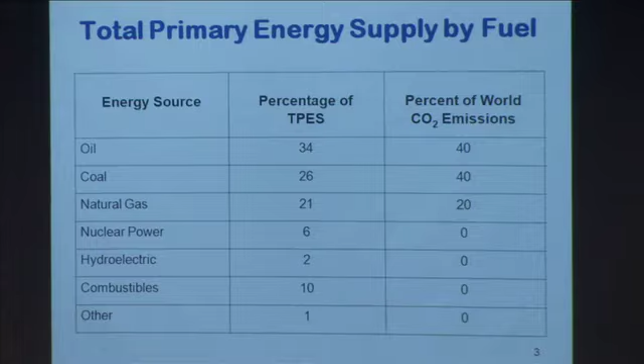So if you look now at the energy supply of the world—does this thing have a laser in it too? Yeah, it should. I'm worried that if I push, that's just what I worried about. Okay, there's the right button.

You can see that this is total primary energy supply—the energy content of the fuel. We do things in a very funny way: for these things it's primary energy, and for all of these things it's output. So before you get to use it, there's a big efficiency loss. From these, we're talking straight about output, but you can see the biggest is oil, coal next, natural gas, nuclear power, and so forth.

You swear this is a better one, huh? Well, I think I'll stick with this. I'll take the risk, I'm going to live dangerously. No, if I may drop it.

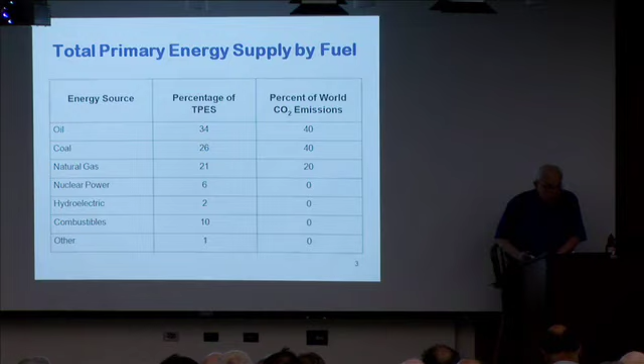When we talk about combustibles, we're talking about the fuel used by the poorest people. The poorest people gather up wood, plants, cattle dung, and burn it. Those combustibles don't have any net emission because everything that went into the carbon in them came out of the atmosphere. It's only when you start adding fertilizer, tractors, transportation and all that stuff that we get emissions. Down here at the very bottom, this includes all the renewables—all of them—and they're negligible now.

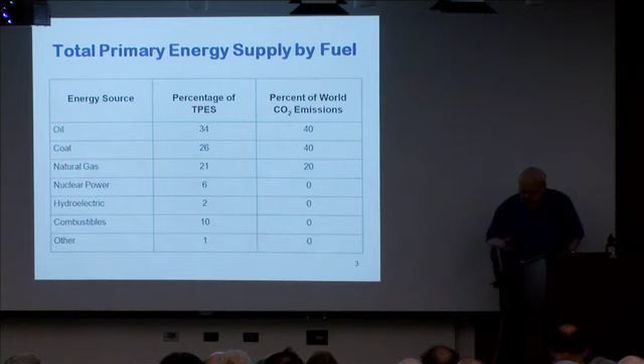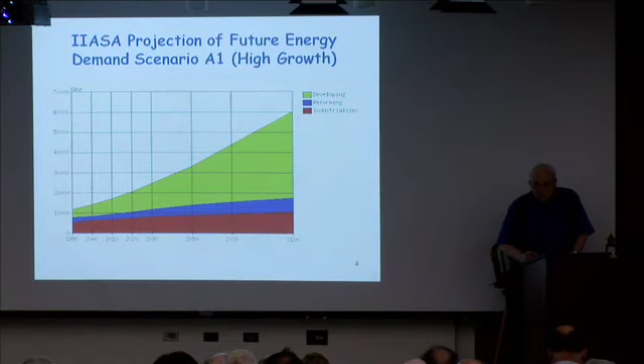I said earlier we've got a problem bringing developing nations into this. This is a projection of what's going to happen in the next 100 years under the business-as-usual scenario. If you like the IPCC stuff, it's very close to A1FI, A1 fossil intensive—that's business as usual. Most of the growth in this century is in the developing countries, not in the present industrialized countries. If the industrialized countries stopped emitting greenhouse gases entirely, we'd still be in big trouble. So we have to develop technologies applicable to the developing world as well as to our own.

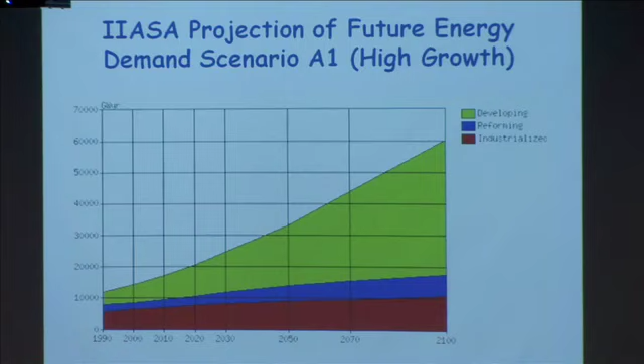That's an important consideration: is business as usual going to happen? Almost certainly not, because the price of oil is going to go through the roof, and coal is going to end up in short supply if this sort of growth continues through the 100 years. But we need solutions that can be applied elsewhere.

These are the IPCC predictions. I put them in so those of you who want to look at this on iTunes or wherever Stanford posts them can see what they are. You get the temperature ranges, and there are lots of issues here.

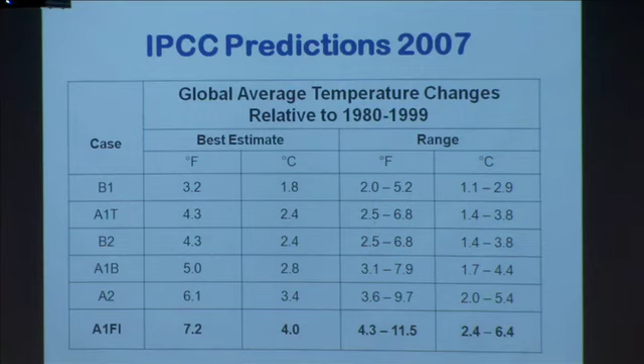There's lots of uncertainty in it, and the uncertainty needs resolution. The uncertainties are of a kind that in physics I would call systematic, not random. There are more than 20 models used to predict the future, and all of those models are tuned to agree with the past. They all have knobs in them—I can make this one more important, that one more important. They're all tuned to agree with the past, and they all disagree on the future. The spread you see here is a spread in models. As time goes on, we're going to learn more, and those models are going to come closer and closer together.

So if you want to look at decarbonization, what do we have to do? In the United States, the biggest single sources of emissions are electricity generation and transportation—those are the two biggies. So if it's electricity, you've got to talk about fuel switching.

We talk about renewables like solar and wind and nuclear, as well as things like geothermal and hydroelectric. If you look at transportation, cars are incredibly inefficient when you look at what goes out of the gas tank into the wheels. The EPA estimate on the typical driving cycle is that 12% of the energy in the gasoline goes to drive the wheels. That's really pretty terrible. So that's going to change, along with buildings.

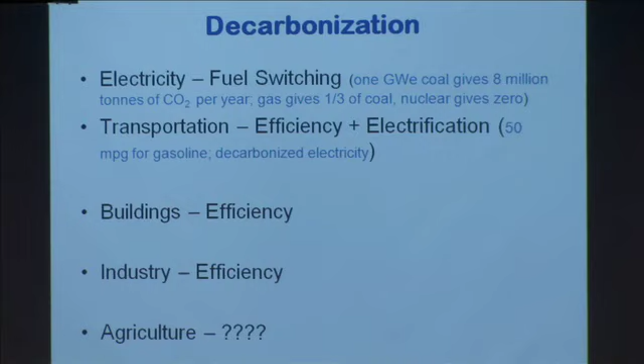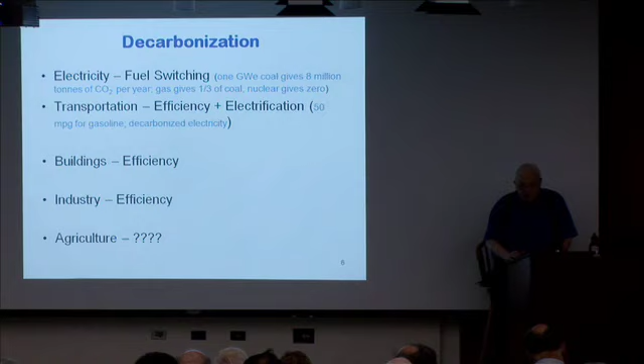We need efficiency—industry needs efficiency. Agriculture is a wild card here, and nobody knows what to do about it. Worldwide, agriculture and land use change accounts for 20 to 30% of greenhouse gas emissions. If you're talking about reducing greenhouse gas emissions by the amounts people are talking about now, by 2050, you have to get at agriculture, and nobody knows how to do it. In the United States it's much less, only about 10%. But there we are.

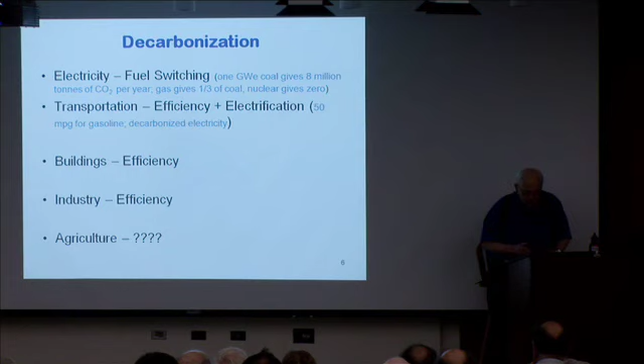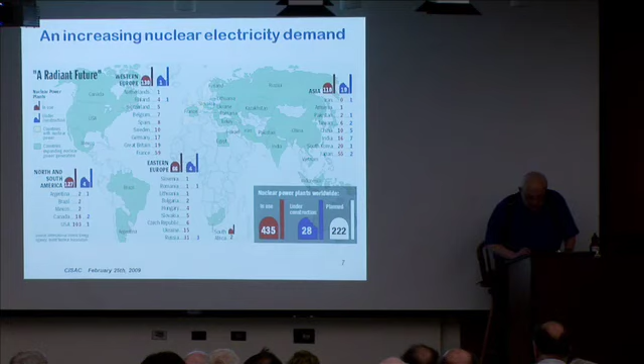This is an introduction to nuclear power. So why should we do nuclear power? There is a worldwide big increase in nuclear power, and if you look just at the United States, you would not understand this at all. There are now 435 power plants worldwide, 28 under construction, and another 200 planned.

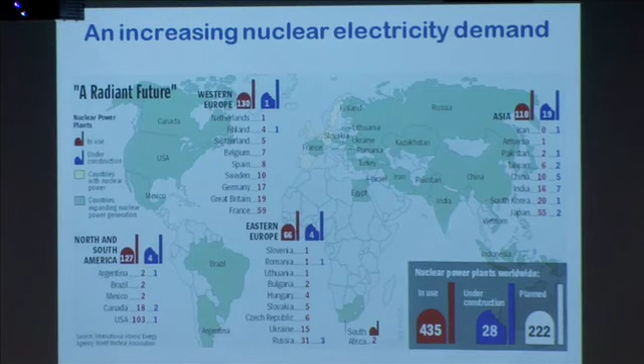Most of those planned are in Asia, but even Europe is moving back to nuclear. Italy, after Chernobyl, abandoned nuclear energy—they now are talking about building 5 nuclear power plants. Britain is going to start again. Sweden has decided not to shut down their plants. The only hardliner still saying let's phase out nuclear is Germany, but that's for political reasons, and we'll see what happens.

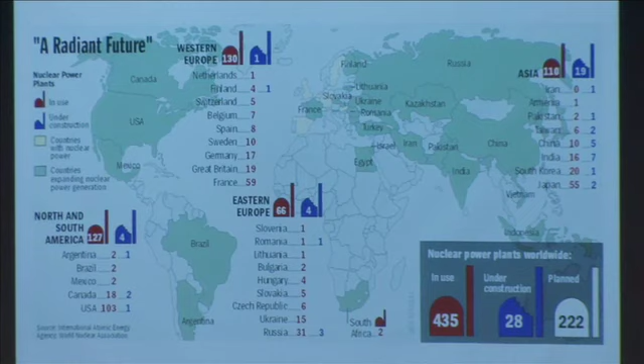The main attraction for nuclear in most of the world has nothing to do with greenhouse gas emissions. It has to do only with available energy. Energy's in short supply, energy's expensive. If you use coal, you do a lot of nasty emissions and hurt all sorts of things, and hurt your population too.

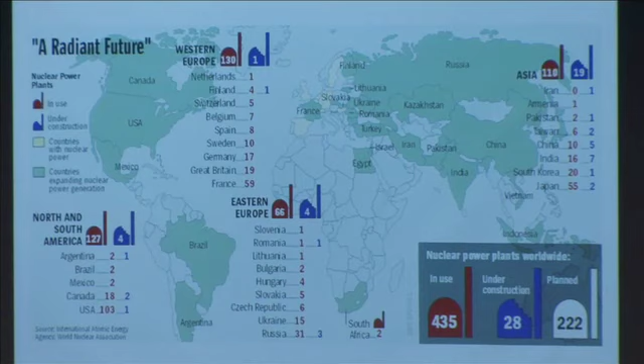So when you're thinking about this, you should be thinking about large-scale electricity with almost no emissions, and what that can do.

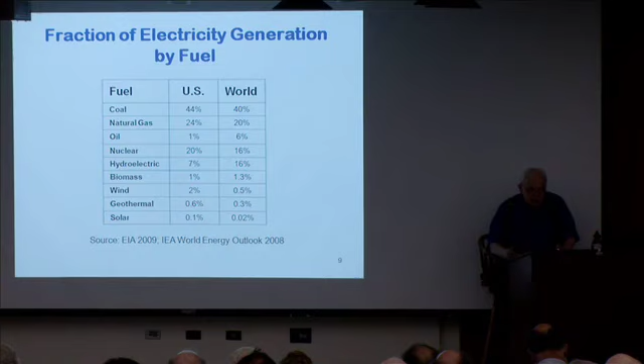This is the fraction of electricity generated by fuel. Nuclear is now 20% in the US, 16% in the rest of the world. One thing I've already mentioned that you should keep in mind is that natural gas is so much better than coal that we really should be switching. Big hydro is already heavily developed in most of the world except for Africa, and nuclear is growing like crazy.

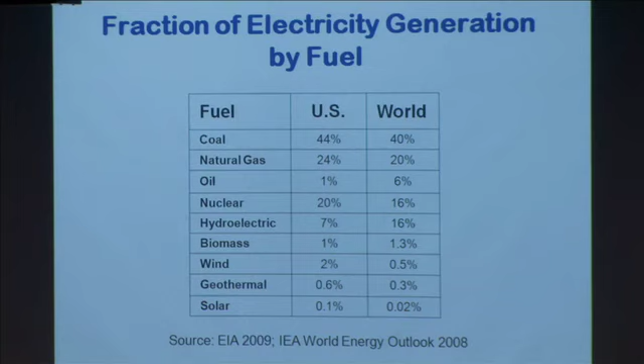Now, how should you think about using nuclear power? Nuclear power is very capital intensive and expensive. To build a big nuclear power plant, costs are something like $6,000 per kilowatt.

Incidentally, that's the same as the cost of solar photovoltaics these days. But you should look at this, and if you're going to build something that's so capital intensive, what you want to do is run it all the time. You want to produce as much electricity as you can because you want to pay the mortgage on all of that stuff.

So if you look at this, this is California, a particular year. You see the big variations in use through the year and through the day of the week. And there's something called the base load. This is a suppressed zero down here.

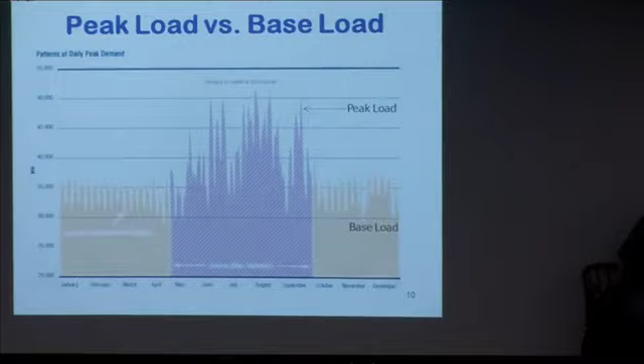And it's about half of the peak. People should think about nuclear energy as baseload power, not the kind that you turn on and off, because if you think of turning it on and off, you're going to find nuclear electricity getting to be unaffordable.

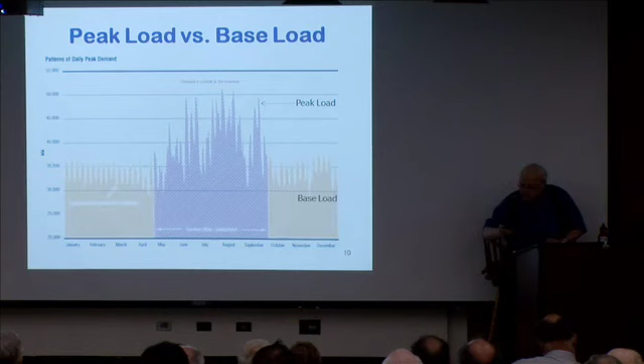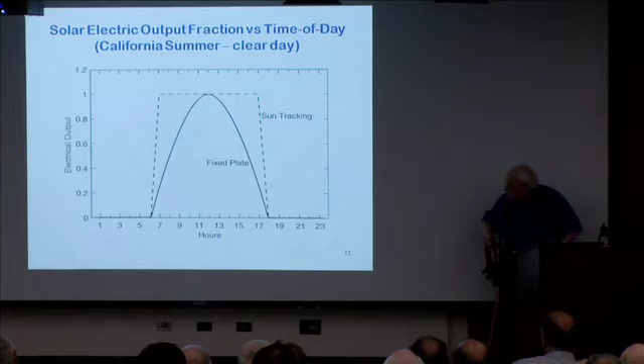If you look at solar and wind, you've got another problem. If I look at solar, this is the output of a solar photovoltaic system, considering the fraction of output from the maximum, which is high noon at the brightest summer day. You can find in DOE's Energy Information Administration a map of the United States showing the average output of a solar system in various regions. The highest region is, of course, the Southwest Desert, and it's 22% of capacity.

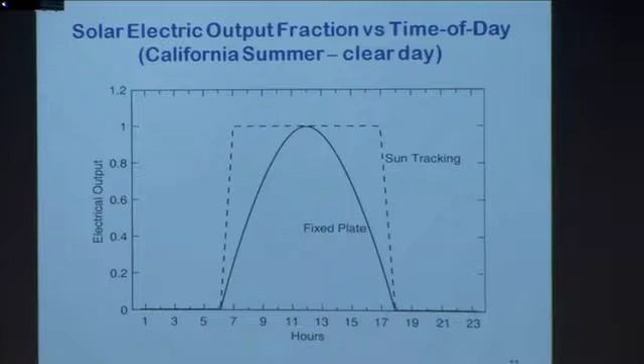So if I put in a kilowatt capacity system and average over the whole year, how much do I get? I don't get 8,000 hours times 1 kilowatt. I get 22% of that. That's the reason solar electricity is so expensive.

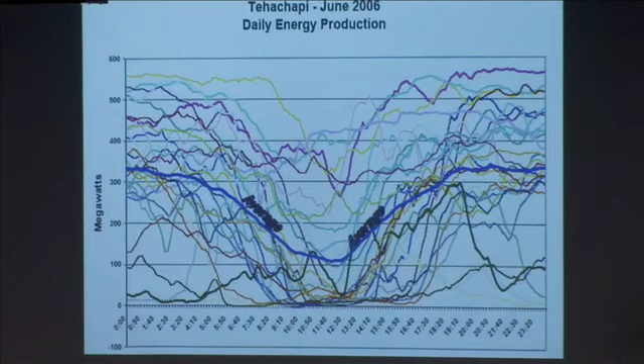Wind is a very messy thing. This is one month of a big wind system in California. If you look at it, you find days when there's practically no output, and days when the output stays up. You find nothing that's constant, just an average that looks like this. Wind has got a real problem, and there's really no good analysis of what to do about it.

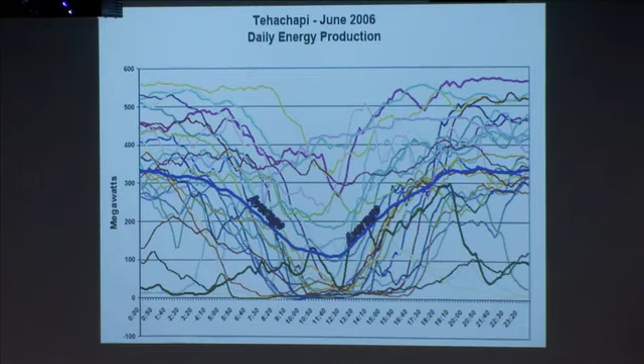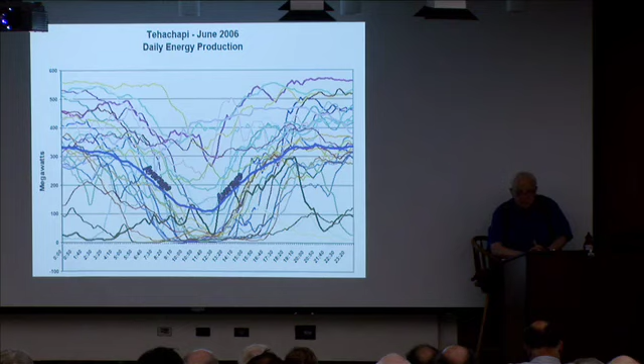The big issue for wind and photovoltaic is energy storage. So any of you who want to solve the world's problems with wind and solar have got to think about how you're going to do energy storage—not the kind you put in batteries. You need things measured in gigawatt weeks, not megawatt hours. What's being talked about today is megawatt hours of storage, not gigawatt weeks.

So if I had to advise any of you how to make the biggest impact on greenhouse gas emissions by using renewables, I would say go to it and do storage.

So let's switch to all nuclear, and here's what the problems are. The critics say that nuclear costs too much. They say it's not safe—radiation and accidents. They say waste disposal is a problem, and they say the chance of weapons proliferation is too big. Let's look at all of these things.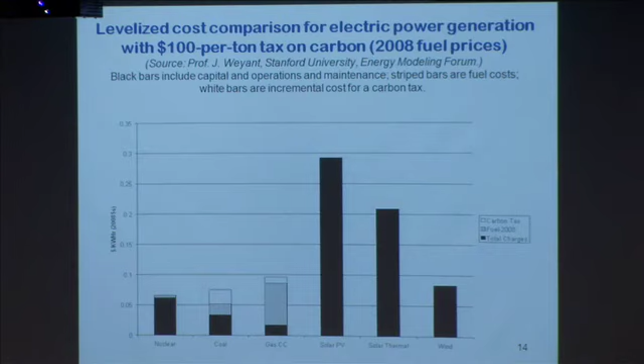If you look at natural gas, the biggest thing is the fuel cost, but natural gas prices have come way down since this was done. Now if you look at solar photovoltaic, solar thermal electric, and wind, the problem is that the sun doesn't shine all the time, and you have to amortize your investment over the time the sun shines. So as far as cost goes, nuclear is fine.

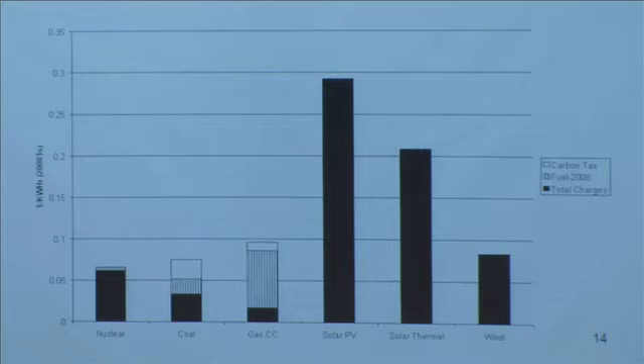There are 3 new analyses—there are references in here at the end if you want to look at them. One done by the National Academy of Sciences in their new study, one by the MIT Energy Group, one by the DOE. They all say 6 to 8 cents a kilowatt hour for nuclear electricity.

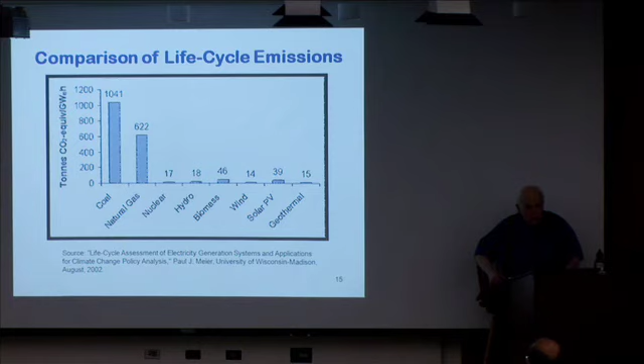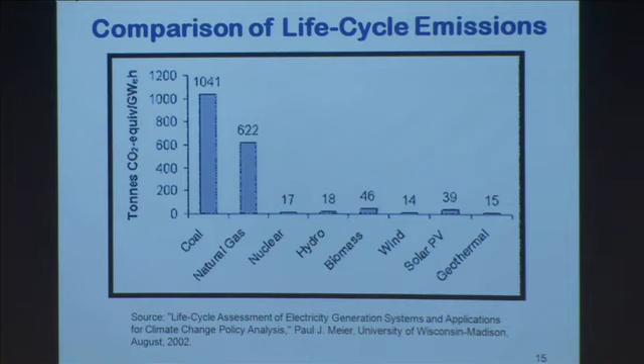People wonder about life cycle emissions. So here are life cycle emissions. Now, what do life cycle emissions mean? It means I have to make the steel for the plant, and that emits greenhouse gases. I have to transport it. I have to mine whatever fuel I'm going to use. I have to refine it. I have to bring it in. So here's life cycle emissions per kilowatt hour, and you can see that as far as nuclear goes, nuclear and the renewables are all about the same. So that is not really a problem.

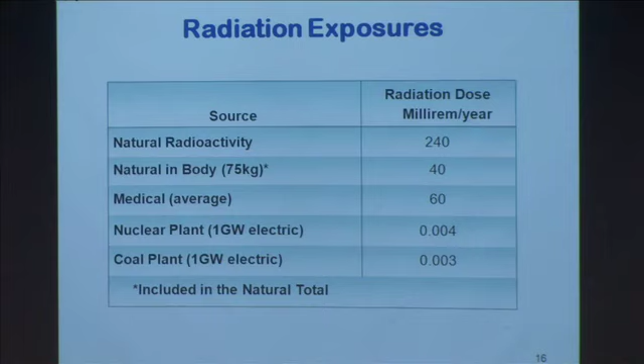One of the things that worries everybody is radiation. Natural radioactivity: when the Earth was formed 4.5 billion years ago, it got uranium in it, thorium, potassium, long-lived potassium. So there's a natural radioactivity that we live in. Cosmic rays bombard us from space all the time.

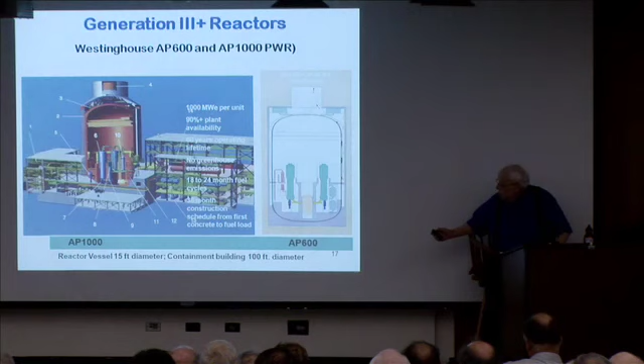If you look at the typical thing that the average US citizen gets, it's 240 millirem per year. Never mind what a millirem is, just think of it as a relative measure. That's what humanity has evolved in. We live in that. One of the things that surprises everybody is that everybody is radioactive.

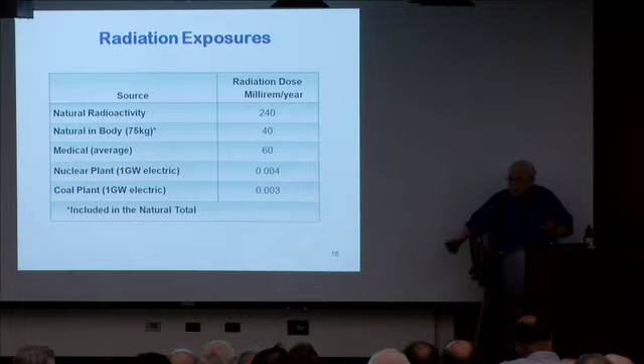You're radioactive because one of the things incorporated into all our bones is this potassium. Potassium has nothing to do with bomb tests. It was put into the planet when it condensed out of a solar nebula 4.5 billion years ago. It has a very long lifetime, and when we build our bones, potassium and calcium, being chemically related, get incorporated, and we get 40 millirem. A sixth of the natural dose comes from that. A skinny person gets less, a heavy person gets more. If you're sitting next to a skinny person, you are getting less radiation than if you're sitting next to a not-skinny person. So you might think about that one.

Medical imaging gives us more, and the nuclear power plants give you 0.004, 1/10,000th of what you get from your own body. A coal-fired power plant gives you about the same. Now everybody looks at that and says, well, that's if they're working right. What if they're not working right?

There are two big accidents that came along: one is Three Mile Island, and the other is Chernobyl, and their consequences are totally different. They're different because the reactors are built differently.

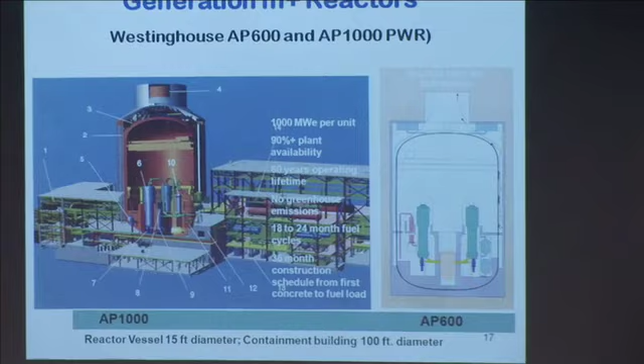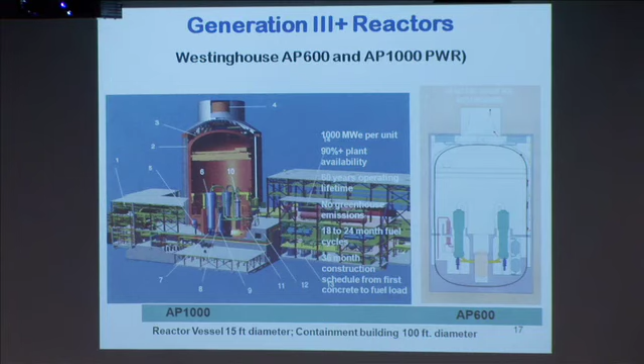This is a schematic of what a nuclear reactor looks like if it's built in Japan, the US, China, or Europe. It's got a big containment building around it. The reactor itself is a small thing in the middle, and the longer things are the steam generators. So here's the reactor, the steam generators, and this is the containment building.

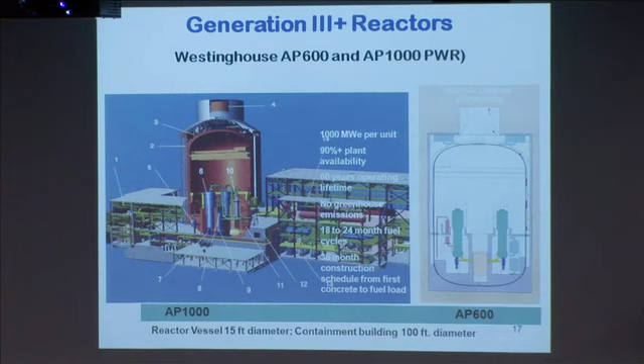If something goes wrong in the US, the containment building is supposed to hold it, and that is what happened at Three Mile Island. The core melted down. It released all sorts of radioactive nastiness inside. Radioactive gases escaped from the reactor, and radioactive water leaked out, but very little got out of the containment building. The biggest exposure to anybody at Three Mile Island was 100 millirem. Remember, 240 is the natural amount, and typical for people nearby was 10 millirem, relatively negligible on that scale.

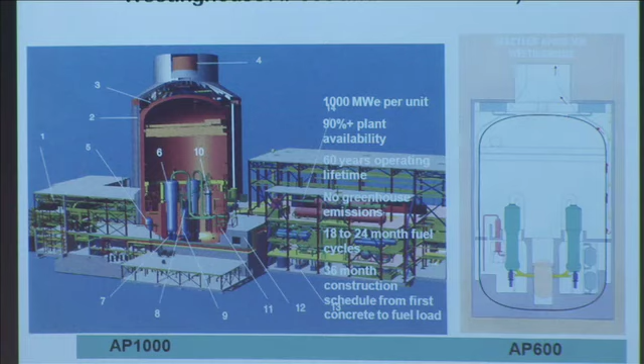The reason Three Mile Island makes such a big impact is a Jane Fonda movie called The China Syndrome. All you students are too young to know about it, but the thesis was that a reactor ran away and the core melted, and this hot stuff melted down through the bottom of the reactor vessel and through the building, going to melt its way down into the earth and come out in China—hence the China Syndrome. I don't know how Jane Fonda and the hero saved us all, but they did. That movie came out 12 days before Three Mile Island happened, and it had a lot to do with the reaction.

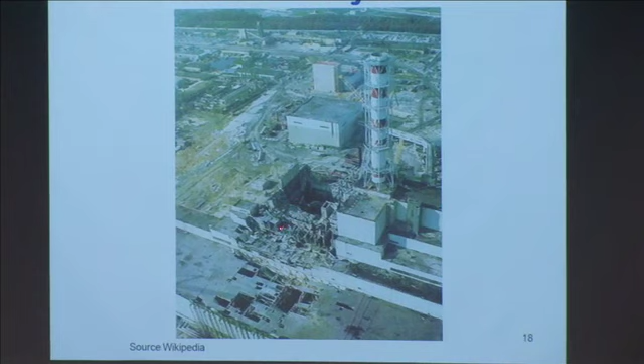Chernobyl is a very different situation. That's the Chernobyl reactor building. There are 4 reactors at Chernobyl; you can see some of the other ones here. This is the building from the one that went crazy. They have no containment on this kind of reactor, and the other problem is it can become unstable in certain operating conditions. For some reason, they took it into that region and it ran away.

This is not a nuclear explosion—this is a steam explosion. The reactor's output went up so fast that control rods couldn't move, and the superheated steam blew the roof off the reactor, blew the roof off the building, and spread the radiation far and wide.

Those reactors have never been allowed in the West or in Asia, strictly the old Soviet bloc. The European Union and the US have contributed a lot of money to modify reactors of that type in the old Soviet bloc and to shut down some of them.

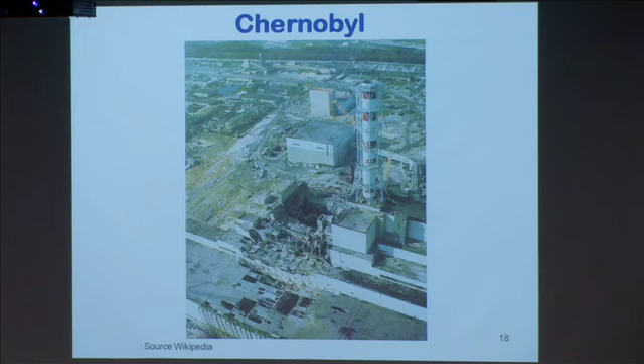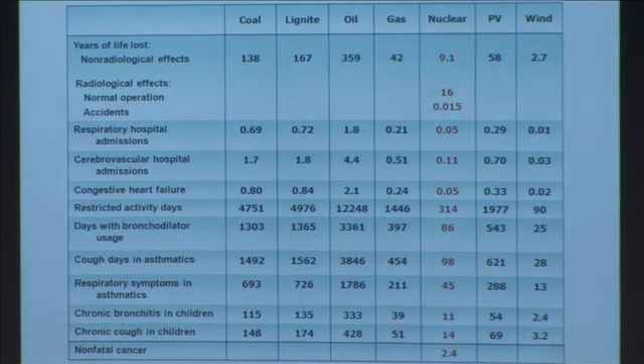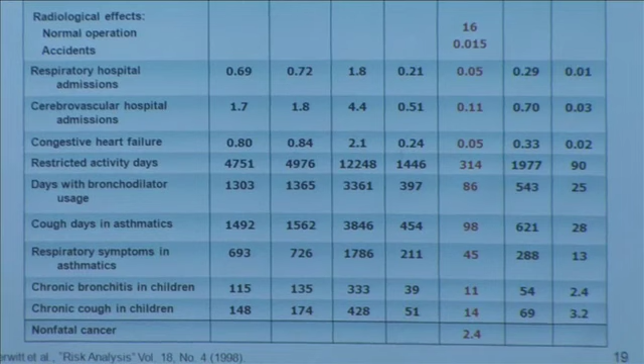Another thing people talk about is health effects. Now, health effects you can argue about. This is the only comprehensive study I can find. The reference is down there in the corner. It's a study done in Germany for conditions in Germany, looking at various kinds of energy sources, and the units are per terawatt hour, so this is per equal electric output.

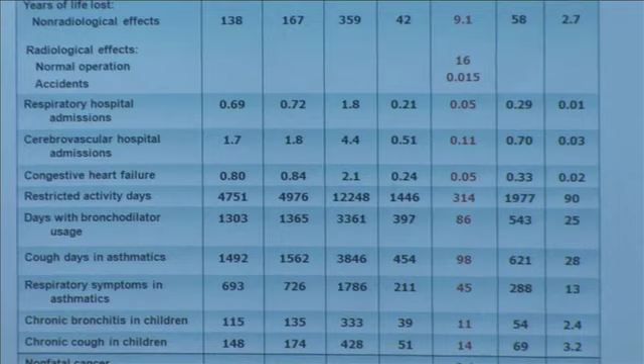It's supposed to include everything: mining the fuel, transporting the fuel, accidents on the roads with trucks involved in the pollution, all the rest of it. And if you go through all of this, what you will see is that the only thing better than nuclear is wind power in this analysis.

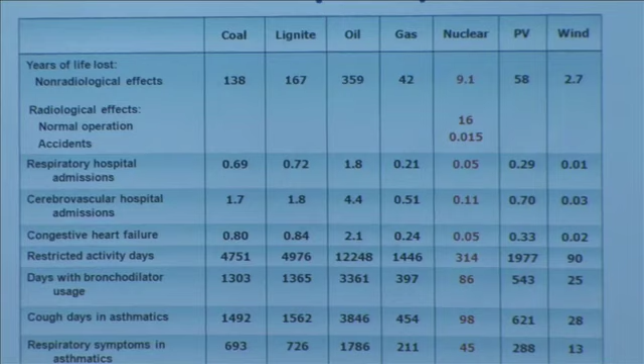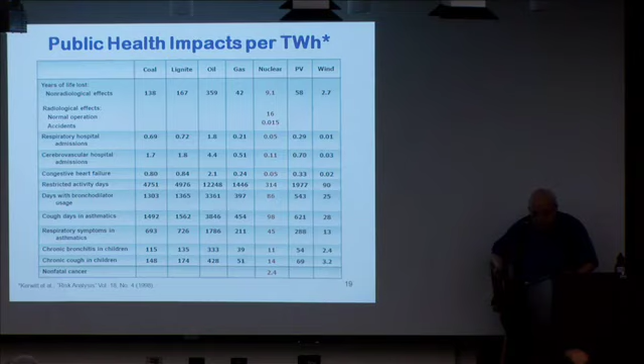This is including accidents. So per terawatt hour, accidents are very improbable. So if you think about this, you will see that nuclear is relatively safe compared to most of the others. This will be in the slides, and if you want to know about bronchitis and admission to hospitals and all the rest of it, it's there. But I thought this one is a biggie: the number of deaths per terawatt hour.

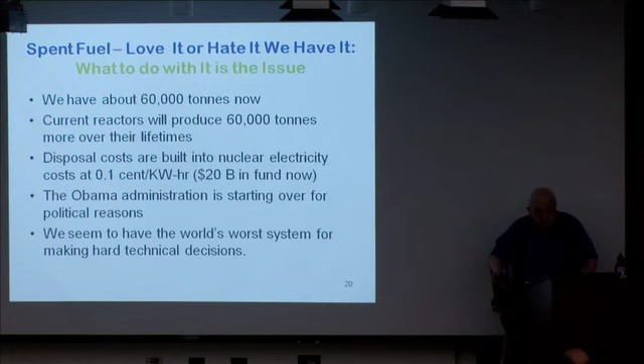Spent fuel. Spent fuel. I always start talking about spent fuel by saying, love it or hate it, we have it. We have 60,000 tons of spent reactor fuel now. The current reactors now existing are going to produce another 60,000 tons of this stuff before they end their 60-year lifetime. We've got to do something with it, and what to do with it is the big issue.

The costs of taking care of this are built into the cost of nuclear power. Right now, for every kilowatt hour of nuclear electricity, you pay one-tenth of a cent into the Federal Waste Disposal Fund, which now has something like $20 billion in it, and will totally have $50 billion over the lifetime of the reactors. That fund is supposed to pay for disposing of spent fuel.

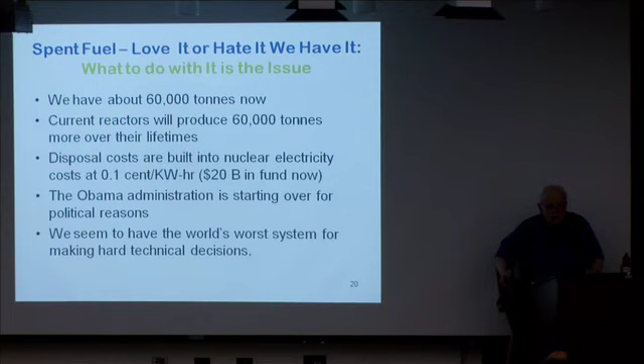In the United States, the law says that spent fuel becomes the property of the federal government, and it's the federal government's responsibility to put it away. But paying for putting it away is done by the users of nuclear electricity. So the utilities have to give the feds some money.

Now, the Obama administration is starting over again, for political reasons. This has nothing to do with whether Yucca Mountain is safe or not safe. DOE did a very long analysis, submitted an application for license to the Nuclear Regulatory Commission. The Nuclear Regulatory Commission is the umpire here.

They look at this and say, do we agree that this meets all the standards for containing radiation for 300,000 to 1 million years? That process had just started when the Obama administration pulled the plug on it, and the reason they pulled the plug is to help Harry Reid get reelected again, although I'm sure they would argue with me if I said that, but it's really true.

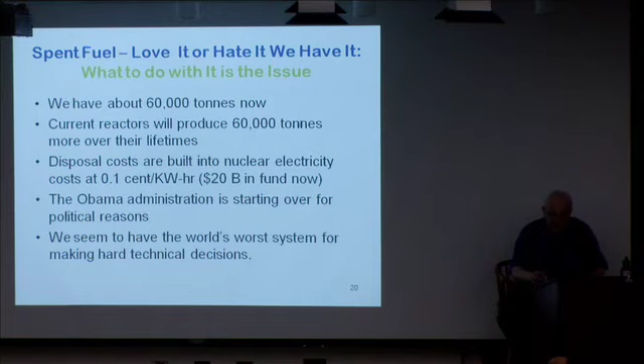So we're starting again, and we're looking at other options. Are there other options? Yes. Do we know what those options are? Yes. I would bet you that I could write the report that's going to come from this Blue Ribbon Commission. I could do it all next week. If somebody would bet me enough money, I would do it, and then we'd see what happens when the thing comes out. There are other ways of disposing of spent fuel other than Yucca Mountain, but is Yucca Mountain safe? Yucca Mountain's safe, I think.

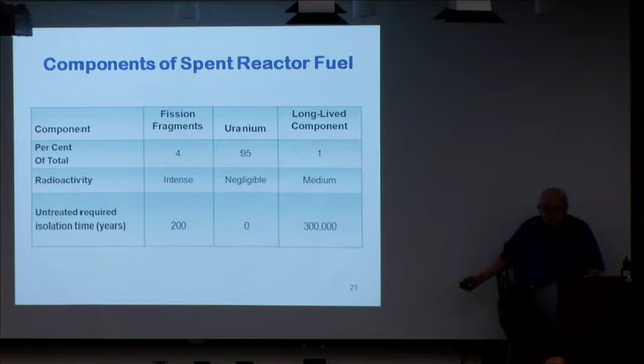So what's in spent fuel? Well, if you look at it, fission fragments are 4% of it. This is where the really intense radiation comes from when it comes right out of the nuclear reactor. 95% of it is uranium, the same uranium you took out of the ground when you mined it. You could put it back in the mines that you got it from, and it would be no different.

1% is these long-lived components. These are called the actinides. They're medium radioactive, but they live for a very long time. And so this is the problem.

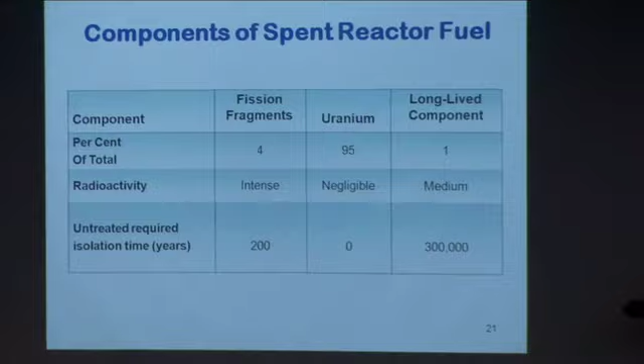If all I had to worry about was this one, I would build things and people wouldn't worry about it. The Egyptians built pyramids that lasted 5,000 years. We could easily build pyramids that last 500 years, put this stuff away, and just let it decay and not worry about it. So the actinides are the problem, and the actinides have one other problem too, but here's what the actual radiation looks like.

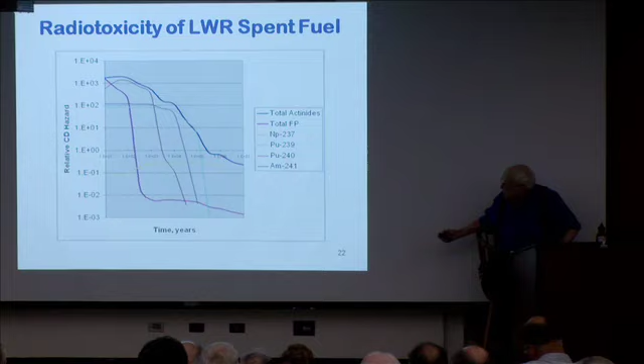Okay, so here's all of it. This one, the one that comes roaring down, these are the fission fragments - enormous amount of radiation. But when you get out to the very long times, these are all the actinides. This is the stuff that's 1% of the fuel, and that's what you've got to keep out of the chain. So a minimum of 300,000 years longer.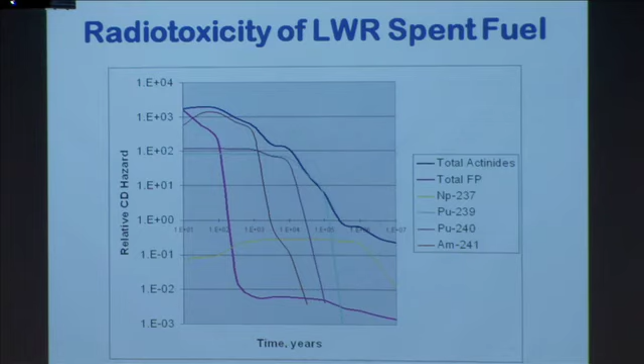So that we took Yucca Mountain. Yucca Mountain is an interesting place if you like the high desert. It's kind of got an odd beauty to it. Congress...

said spent fuel disposal is a federal responsibility. In 1982, DOE was supposed to find 3 alternative sites. They did: Texas, Washington State, Nevada, Texas. George Herbert Walker Bush was vice president. Texas got axed from the list. Washington - Tom Foley was majority leader of the House - that got axed from the list.

And Nevada was left. Did Nevada get treated unfairly? Absolutely. I never understood why the government didn't give Nevada a sweetener. We spent huge amounts of money on civilian things, and we should have come up with something for Nevada to make life

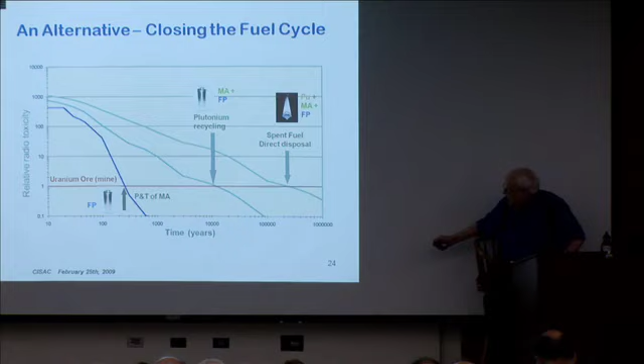better for them. What people are talking about now as alternatives is called closing the fuel cycle. If I could take this stuff and burn it up in a nuclear reactor, turn it into fission fragments, my problem goes away - I don't have to do 300,000 years anymore. If I just take the plutonium, the stuff of weapons, and do that, then I have 10,000 years. That's down a lot from 300,000 years.

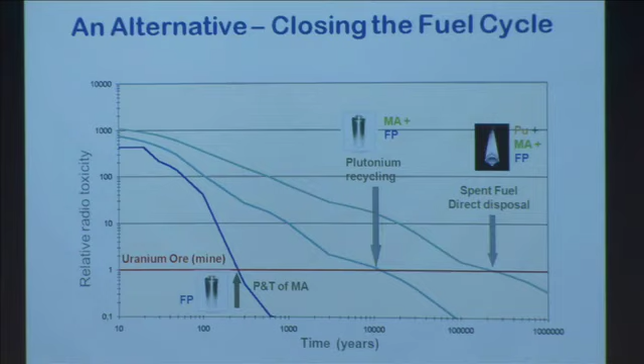If I can get the minor actinides out too, then I'm down to a relatively short time. This is part of the R&D program that's going on worldwide. We have a very incoherent program in the United States. I think that it may be getting more coherent. There's a new roadmap for R&D that's come out of the DOE, and that roadmap looks at what we have to do for this sort of thing. We are not the leader in this. Other countries are the leader, and we're going to see what actually happens.

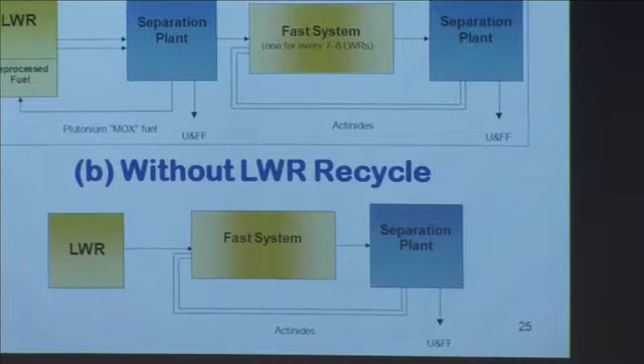So the idea is that you take - I'm just going to use the bottom one here - the light water reactors put out fission fragments, actinides, etc. You separate out the bad stuff, put it in fast spectrum reactors, and go round and round the loop till it's all gone. Why fast spectrum? Because the neutron spectrum in standard light water reactors won't burn this stuff up. So we have no coherent plan, and whether the new plan will actually make it through Congress, we'll see.

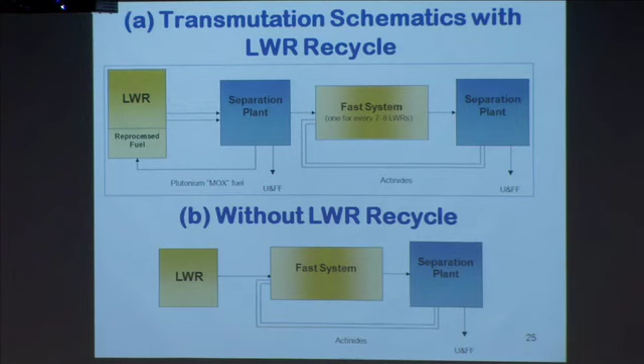So proliferation is the last of the real problems, and it is a problem. Who are the proliferators? South Africa, Pakistan, and maybe Iran, making their weapons from uranium. This is called the front end of the fuel cycle. They have this enrichment facility in Iran. The question is, will they cheat? Instead of going to 4% uranium-235, which you want for a power plant, go to 90% for weapons. Who knows? Iran's protestations that this is pure civilian are rather hollow.

I've been there. They hide things. They don't tell the IAEA the truth. And you'd have to be pretty much of an idealistic, I would say, jerk to believe their protestations.

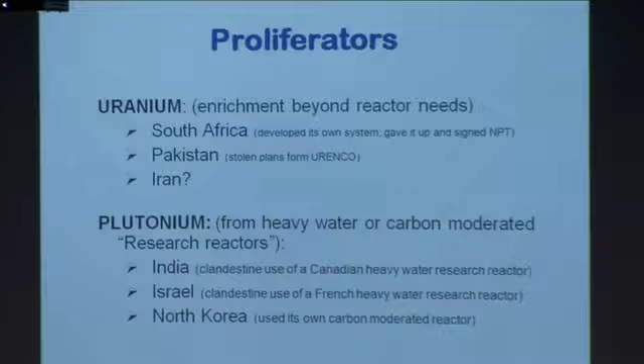Plutonium comes from the back end of the fuel cycle, and you burn up uranium in a reactor. Part of the product is plutonium. The uranium doesn't fission and split, but it captures neutrons and becomes heavier elements. And plutonium is also the stuff of bombs. So the worry is, when you separate out the plutonium to do this multiple cycle stuff, do you give people more of a chance to divert the plutonium into bombs too?

That's a difficult route. A 1 gigawatt electric power plant needs 200 tons of natural uranium to make 20 tons of enriched fuel for each year. For weapons material, 1 ton of 4.5% enriched material sent to a clandestine enrichment plant would make you 1 bomb's worth. So if you divert 5%, you can do it.

Back end of the fuel cycle is more complicated, and I think I'm running out of time, so I want to leave some time for questions. So let me skip ahead.

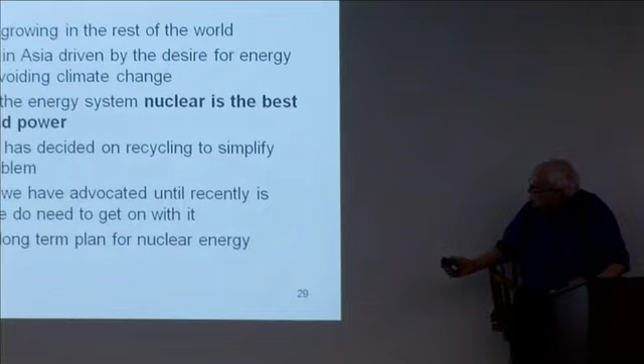Nuclear power's future - what's going on? It is growing in the rest of the world. Doesn't matter what the United States does. It is growing, and it is not only growing, it is growing in a route that involves separating out the plutonium and the minor actinides in the back end and recycling them in reactors.

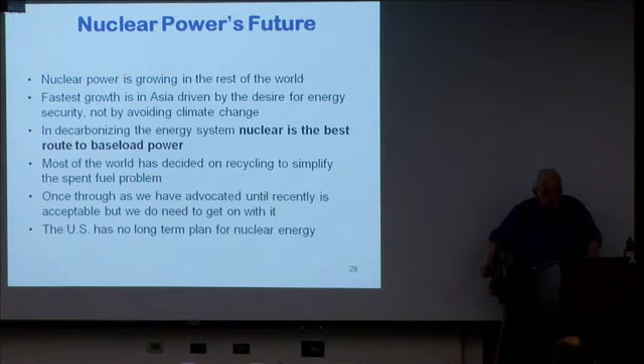The fastest growth is in Asia, and they are not doing it for greenhouse gas reasons—that's a bonus. They're doing it for secure energy supply. Japan has no natural energy supplies at all: no significant coal, no significant oil, no significant natural gas, and it's too small to do all its electricity generation by growing trees and burning them. So they're doing that, but in the process, they're also reducing greenhouse gas emissions.

The US has up till now had no long-term plan for nuclear energy, but one has just come out. If you're interested, the nuclear energy website at the Department of Energy has what they call a roadmap, and you can download and take a look at their strategic plan. All sorts of things are happening. The new thing is small modular reactors that don't take as much money to build as the giant ones. That's going to become rather popular, and we'll have to see where we go from here.

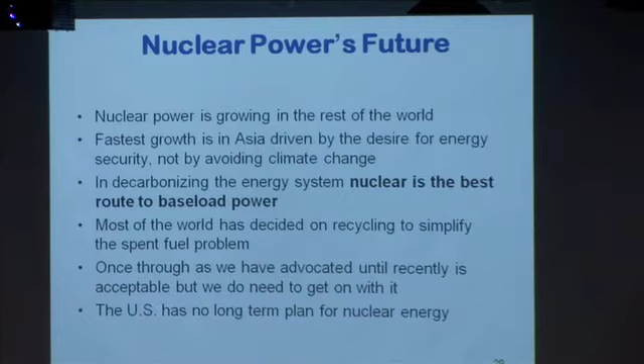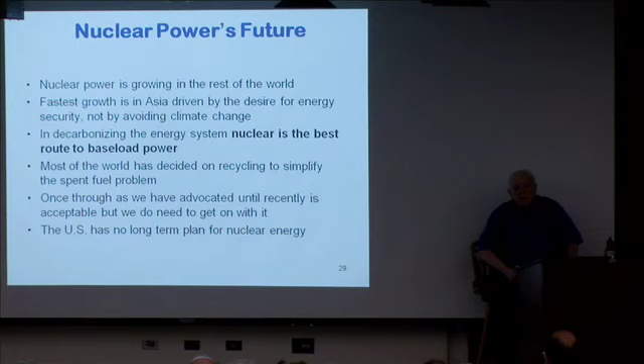But the United States right now, to the rest of the world, is all talk and no action. If we don't have any program, and if we don't participate in the nuclear world, nobody's going to pay any attention to us. People would like to pay attention to us. People acknowledge that we have the best operating nuclear plants in the world, with uptime at 92% last year, far better than anything else in the world. We are acknowledged to have the strongest and best regulatory system—you should go to that talk by the head of the Nuclear Regulatory Commission. We are very good, and people are interested in learning how to do things from us. But as far as how to build reactors, as far as how to handle the fuel, nobody's going to pay any attention to us unless we get into the act.

I didn't even know I had that one. Anyway, I'm going to skip that.

I'm going to end by just telling you that there are a bunch of references that make things easy to read. And with that, let me quit and turn it over to you for questions.